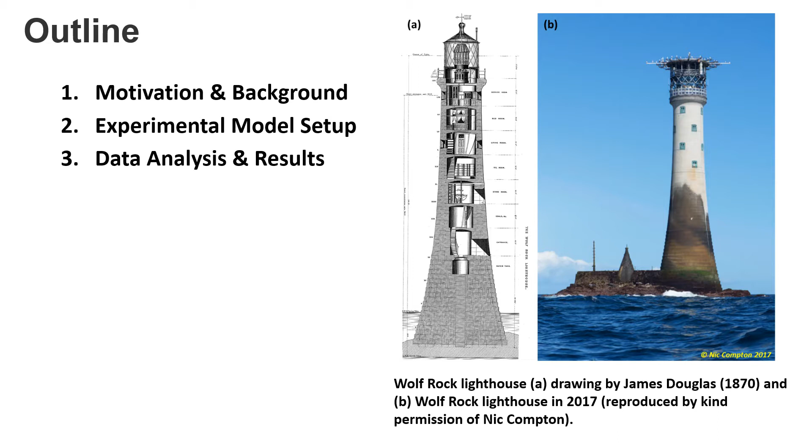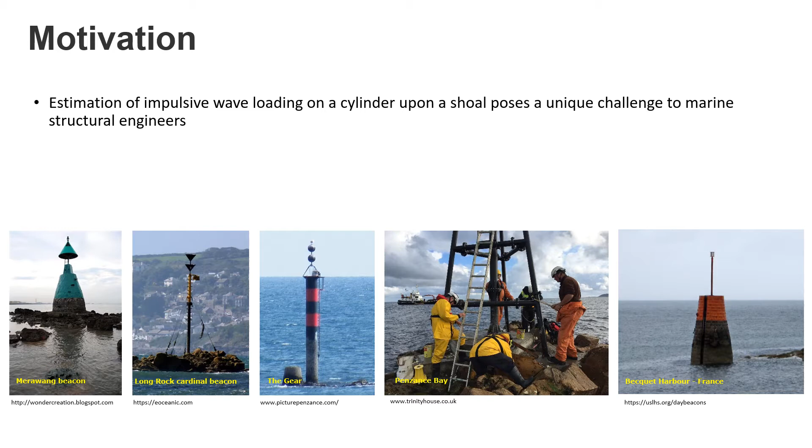First, I will give a brief introduction to the project, which will be followed by experimental model setup, and finally I will conclude my presentation with some results. Estimation of impulsive wave loading on cylinder upon shoals poses a unique challenge to marine structural engineers. We believe this research study will enhance our understanding of the loading and will support us to design the structure shown below. This project was conducted as part of the broad STORMLAM project.

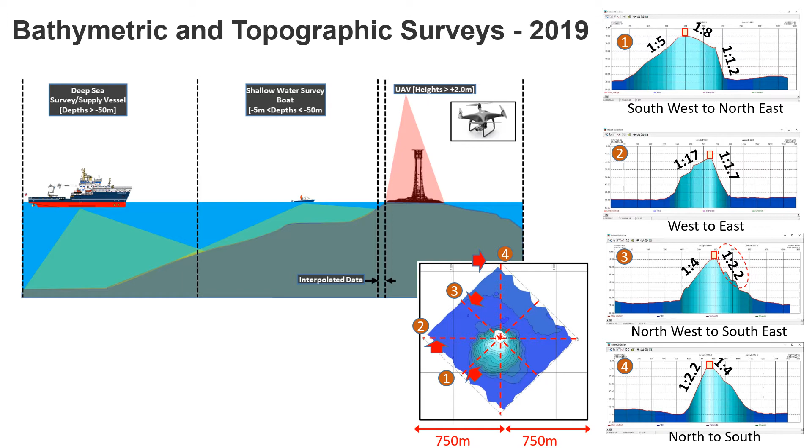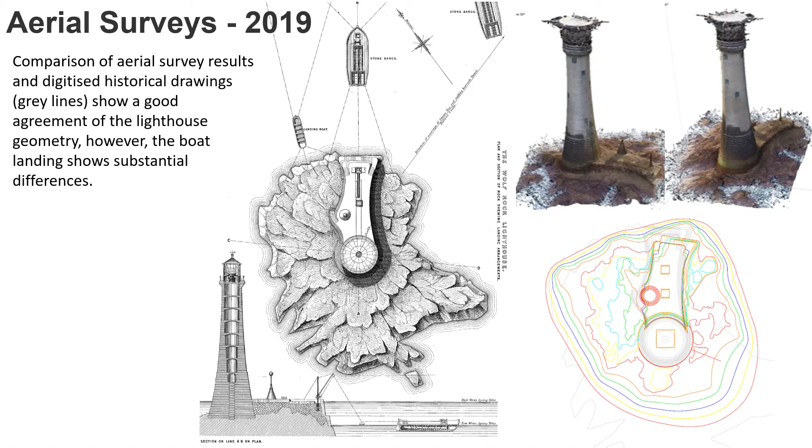After carefully analyzing the wave statistics and the rock slopes, it was decided to perform laboratory tests for the sector between 270 and 300 degrees from north that represent approximately 50% of the dominant wave directional sector. And the design water level was +6.9 m CD that represent a 1 in 100 year storm that could come in 2067, which is our time horizon.

Based on the hindcast wave data sets, we came up with wave heights which have a return period of 250 years for 2017 and also for 2067. So for 2067 we are expecting H 0.1% to be 25 meters.

Ocean basin tests were carried out in the deep basin of University of Plymouth, which is approximately 35 meter long, 15.5 meter wide and 3 meter deep. The main objectives were to generate a comprehensive data set for calibration and validation of CFD simulation, develop a more realistic force time series that can be used as an input for our structural dynamic model, and also to generate some lab tests to compare with field measurements using stereo imaging system.

The model scale was 1 in 40, which resulted in a lighthouse approximately 1 meter tall. The lighthouse was 3D printed, and then the bathymetry was made from wood. We had to truncate the bathymetry, and so we constructed only between -48 to 0. The ocean basin in University of Plymouth has a movable floor, which can be raised above the water level to have dry construction. Then we can lower it to the desired water depth, and we can achieve up to 3 meter water depth.

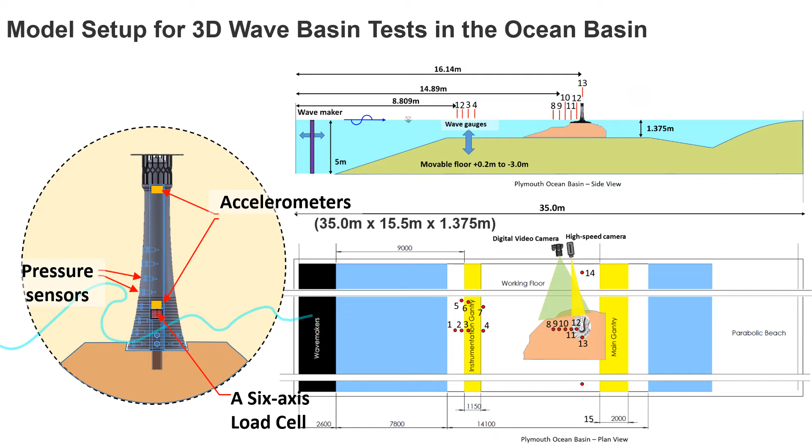The figure towards the left shows the instrumentation inside the lighthouse. The lighthouse is equipped with 12 pressure sensors, 2 accelerometers, and one 6-axis load cell. In addition, the wave basin is equipped with 12 resistance type wave gauges to measure the water surface elevation, and also we used calibrated high-speed camera and digital video cameras to measure wave runup, and also wave transformation on the reef.

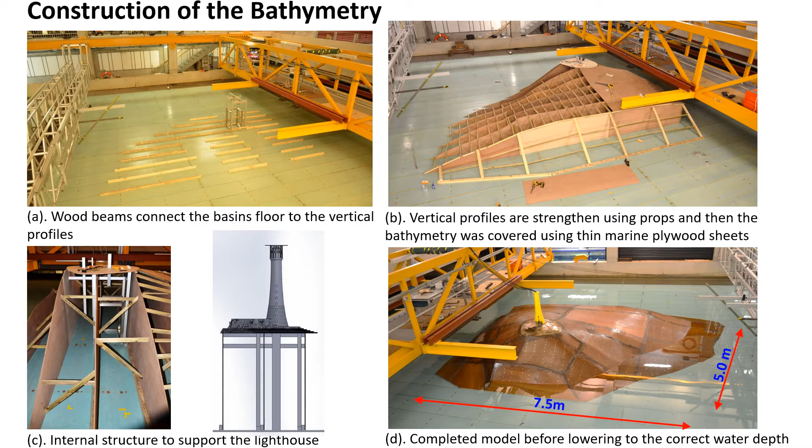In order to improve the accuracy of the rock pinnacle, 18 mm thick horizontal wooden profiles were used from 0 chart datum onwards. Just to recall, our design water level was +6.9 chart datum. The steps between profiles were then smoothened using wooden filler and finally coated with a water-resistant resin.

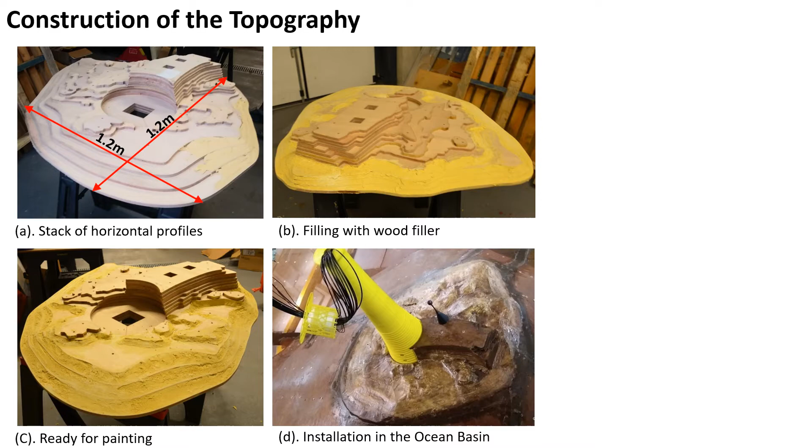The lighthouse was 3D printed as 11 separate components, and then they were put together using an aluminum column. Printing the lighthouse as several components reduces the risk of reprinting the entire lighthouse if something goes wrong during the printing process.

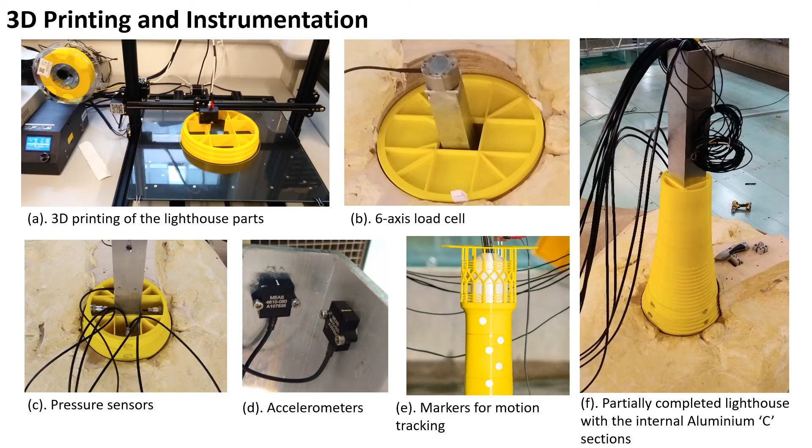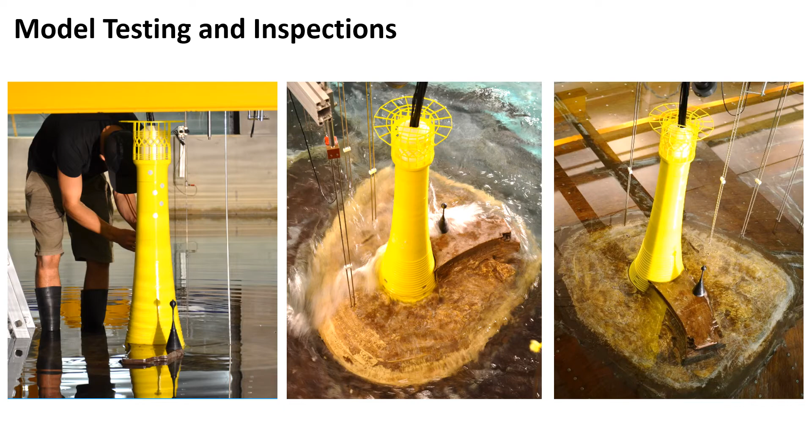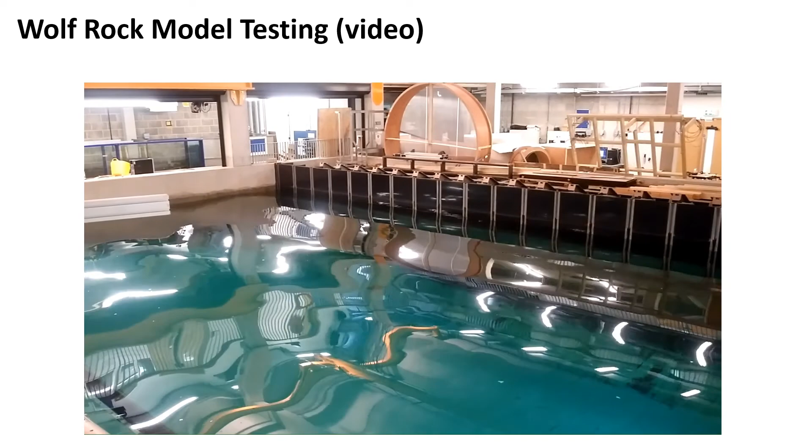This video shows the model testing. A wave generator consisting of 20 separate paddles generates waves, which then approach the Wolf Rock model. As you can see now,

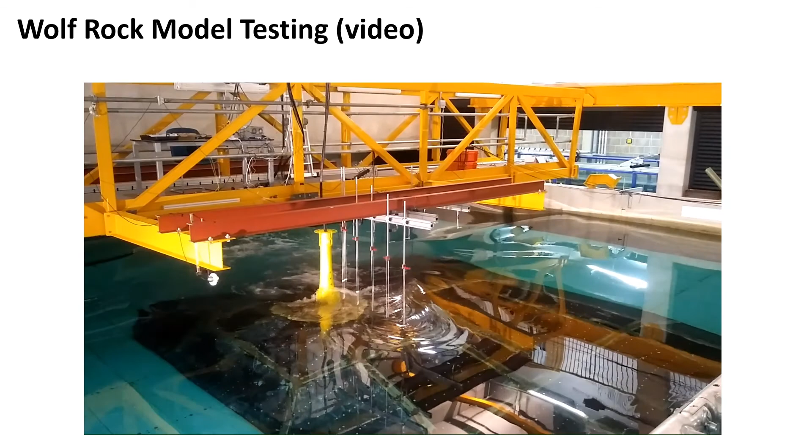here we have some preliminary results. For the comparison, we are using the estimated impact force to create an uplift or opening up of the masonry courses. This force is only valid if the wave is hitting the area proposed by the Wienke-Oumeraci method.

Figure A shows the theoretical impact area derived from the Wienke-Oumeraci formula for 2017 and 2067. And the graph shows the force time series of the theoretical force, which lasts only 0.07 seconds.

Figure B shows the force time series from the physical modeling, which shows the force goes much higher than this theoretical uplift force, and also the duration during which it goes above the threshold is approximately 50 times larger than the theoretical duration.

However, later we found that it is not critical because the impact area is not the same as the theory proposed. The impact area is much lower than that. Therefore, the load required for uplifting or opening up the courses is much higher than this calculated theoretical force.

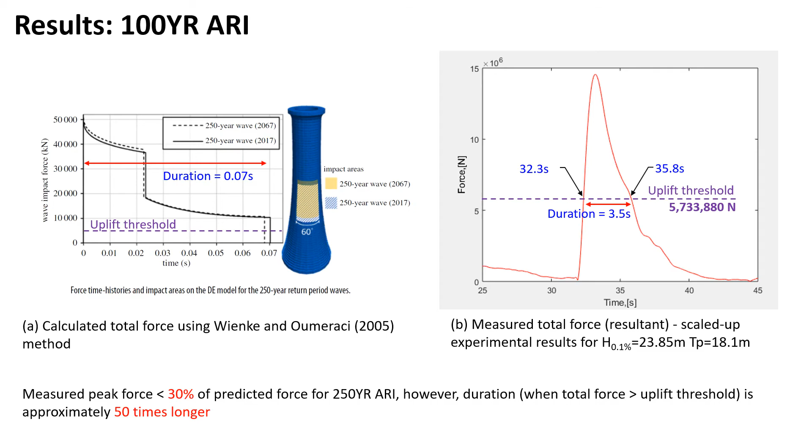The plots here comparatively show results from regular wave tests and focused wave group tests. Focused wave groups enable us to reproduce larger waves up to a significant wave height of 12.85 meters. Also, with the focused wave, the breaker point was much closer to the structure, which resulted in higher total force.

Regular waves result in a maximum of approximately 7,000 kilonewtons, whereas with the focused wave groups, it was possible to simulate events with nearly 16,000 kilonewton impact loads. Kindly note that all the values shown here are scaled up to the prototype scale. When considering the surf similarity parameter, plunging waves result in much higher loads than surging waves.

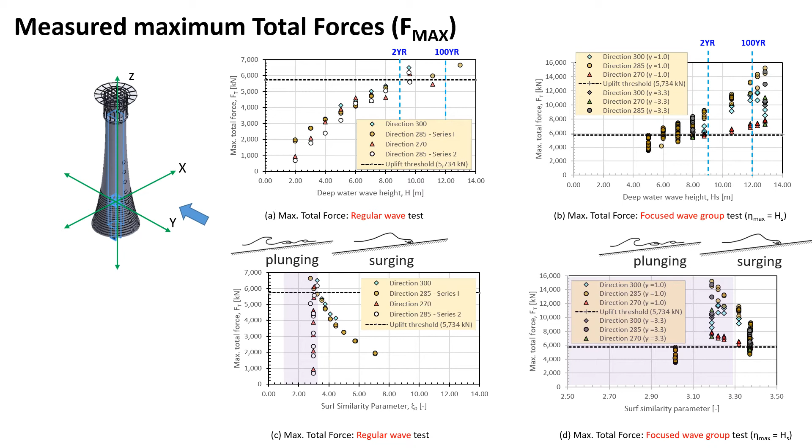The two upper plots, plots A and B, compare the lever arm for regular waves and focused wave groups. As we can see, both regular waves and focused wave groups resulted in approximately the same lever arm, which is between 7 to 8 meters from the still water level.

Figures C and D compare the normalized lever arm against the deep water wave height. As we can see from those two figures, in both cases, the normalized lever arm goes down as the wave height increases. So that confirms the lever arm does not increase as we increase the wave height, rather the normalized one decreases.

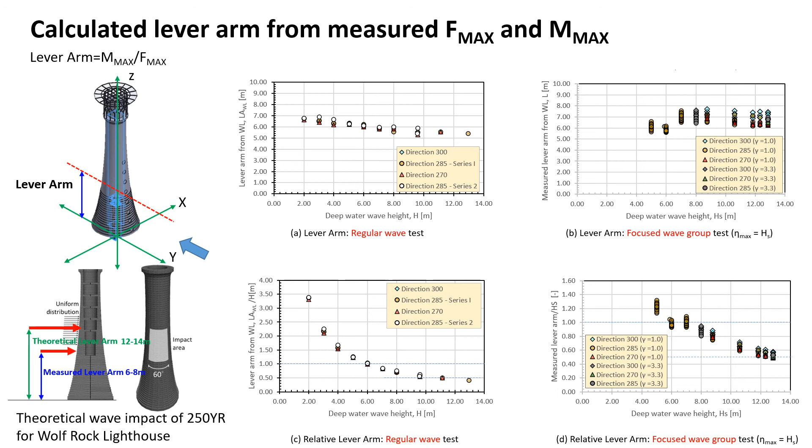As we illustrate in the bottom left figure, the theoretical lever arm is approximately between 12 to 14 meters, whereas the measured lever arm is only between 6 to 8 meters. Even a 1 in 2 year storm shows higher forces than the pre-calculated uplift threshold, and also we observed the force lasts a much longer duration.

However, later we identified the impact area is closer to the base, therefore those high loads do not pose any threat to the lighthouse stability. Force time histories from the small scale model test are very different to those developed for offshore monopiles, for example, the theory of Wienke-Oumeraci 2005.

Also, different incident wave directions show different wave loading that is related to the combination of slopes and wave characteristics. Implications of this study are that the geometry of the rock, bathymetry and topography are crucial for wave loading. Usually existing navigation charts or archive drawings are not sufficient for accurate predictions or accurate modeling.

Climate predictions in terms of extreme meteorological conditions are extremely necessary to correctly assess the risk of exposed rock lighthouses. More importantly, the worst wave loading might not be from the dominant wave direction, rather it could be an average wave coming from a wrong direction or with a wrong combination of wave properties, and also the slope might create the worst wave loading for these structures.